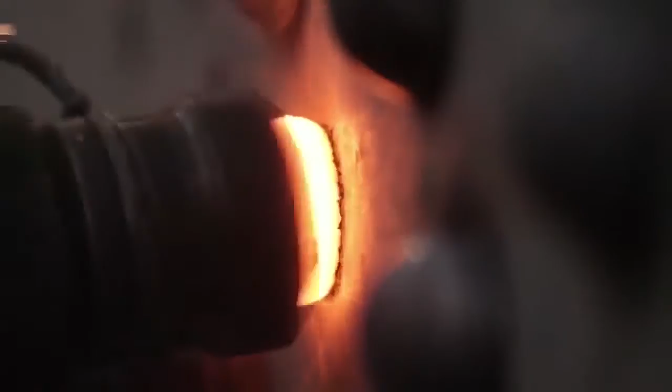But for any change to happen, you need a vision fueled by an ambition. Because everything happens twice, first in the mind and then in the world outside.

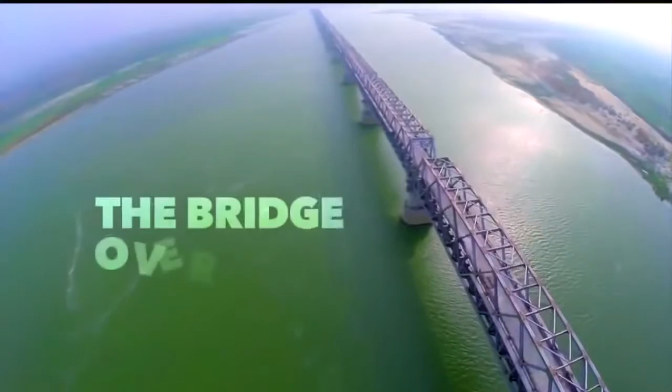The river Ganga, ancient, revered and sacred. Originating from the Himalayas, it reaches the plains, flowing merrily as it meanders its way through the Gangetic plains. By the time it reaches Bihar, the Ganges basin has extended to about 700,000 square kilometers, and the river becomes a wide giant that separates the state in two.

With passage of time, this divide has led to an unequal distribution of resources and opportunities in the state of Bihar. For economic potential to be tapped to the fullest, the need to bridge this divide has become critical.

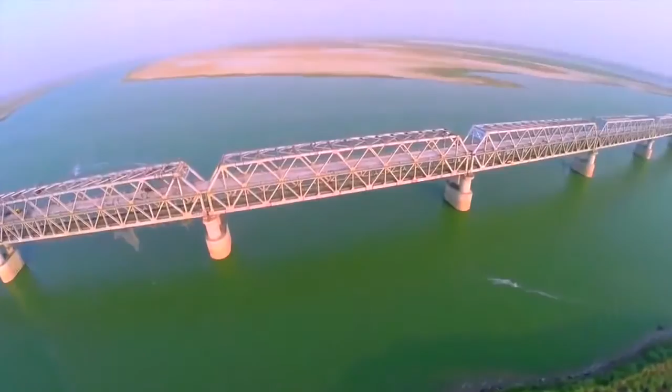IRCON was associated with this bridge in June 2008 when the Ministry of Railway awarded this work to IRCON, and since then there have been various developments over a time span of about 7 years, and now we are seeing the end of the work and commissioning of the railway line, which is going to link the southern part of Bihar across the river Ganga to northern Bihar.

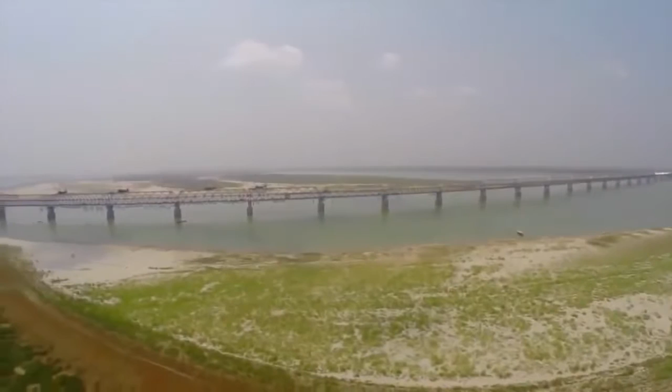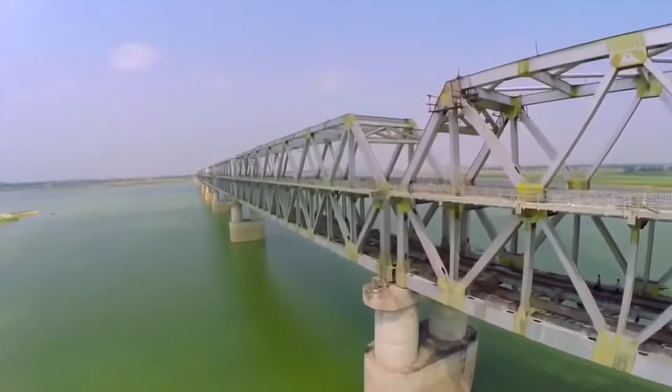36 spans of 123 meters along with 2 shore spans of 64 meters each, with 2200 tons of steel in each of these spans and 100,000 rivets. This is the longest and the heaviest superstructure on Indian Railway.

The erection of superstructure started in September 2010. Floodplains were reclaimed with boulders and earth filling to construct the first anchor span. And within a span of 4.5 years, all 36 spans of 80,000 metric tons of steel were mounted over River Ganga. This 4.56 kilometer bridge is Indian Railway's longest truss bridge.

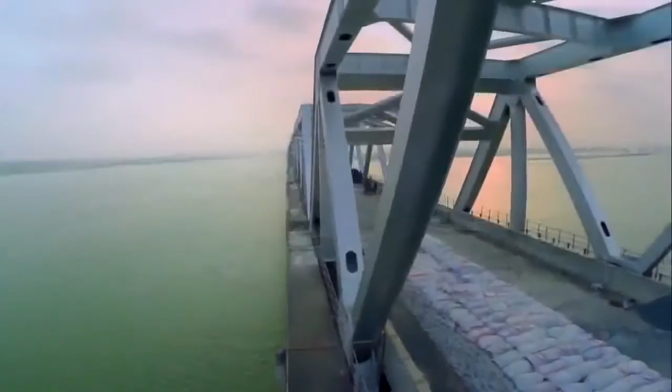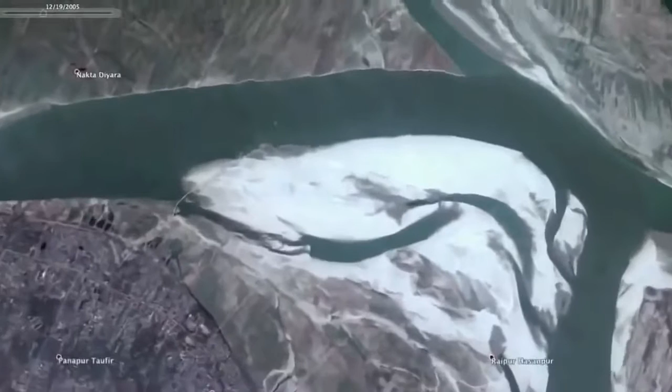The foundation laying had already begun in 2002. It was decided by the ministry to add a roadway above the railway track. By that time, the foundation and the substructure were already complete.

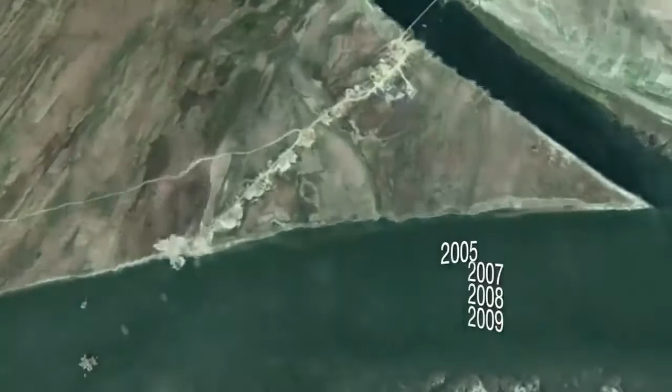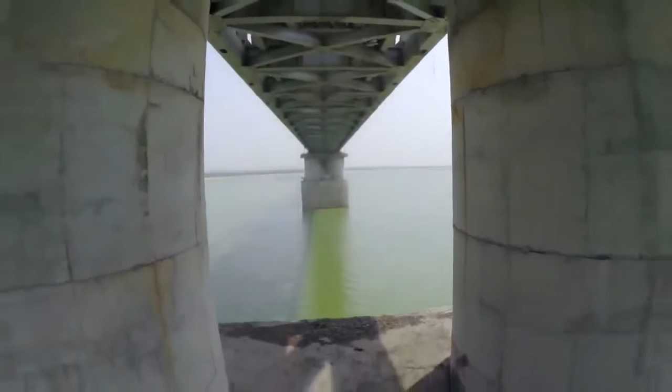This is the foundation portion, which is in the shape of a well, and the well is in the shape of a double D. We have twin circular piers of outer diameter 5.5 meters, having concrete thickness of 0.8 meters. Now the founding level is -8, so the total depth is almost 60.5 meters, which is equivalent to a 17-story building.

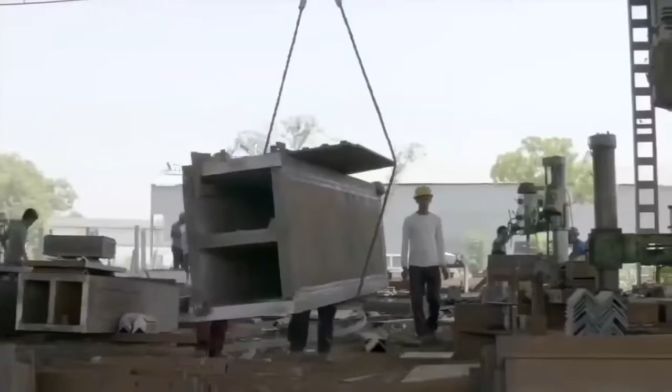To optimize the steel work, we had to go for a higher grade of steel, E450, so that the overall tonnage of the steel could be reduced and the dead weight of the superstructure could be reduced. But nonetheless, we had to use members as thick as 62 millimeters. Fabrication with 2.5-inch steel plate was itself a task.

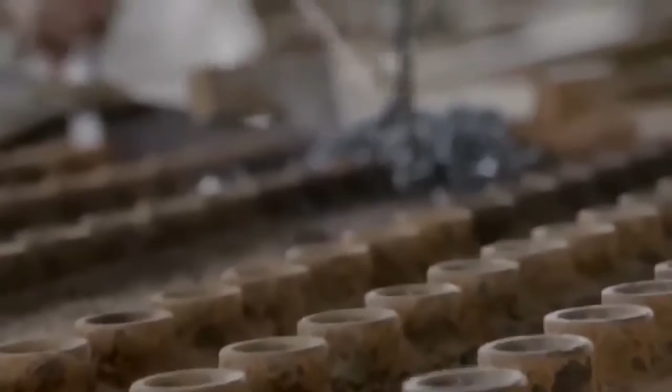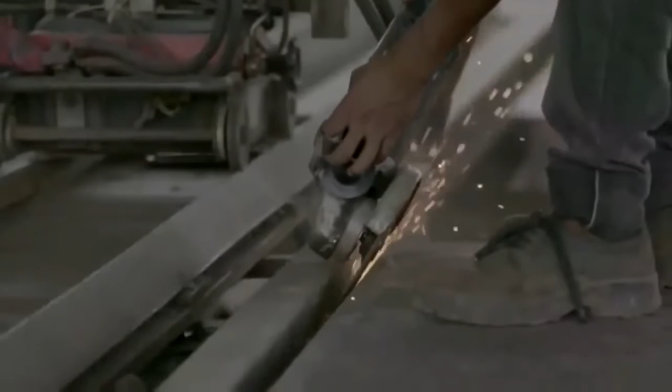Special radial drills and guide jigs become essential when numerous identical drill holes are needed in large numbers. The drill needs to be precise and absolutely correct in position. Once drilled, these plates will become part of a bigger steel component of the bridge superstructure. Then, these plates are welded to form a member of the steel truss.

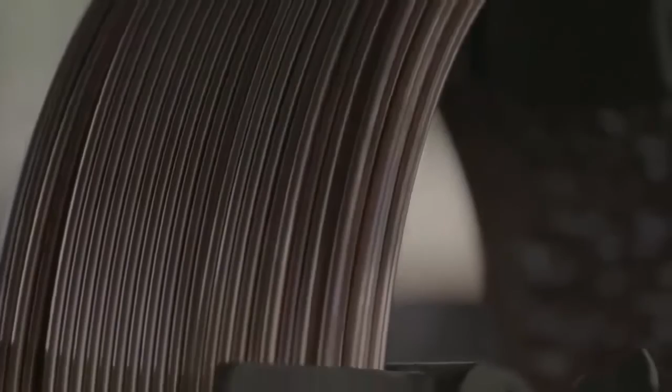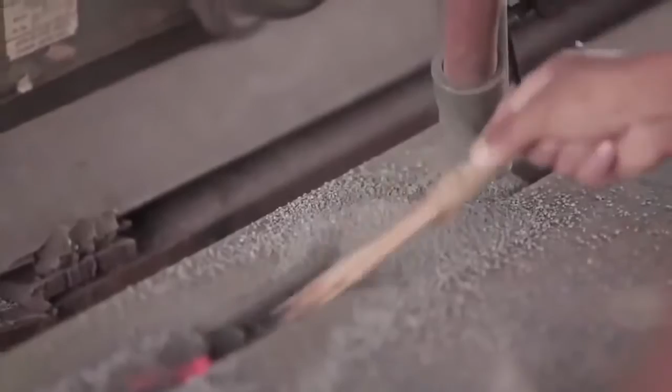A special welding technique, submerged arc welding, is being implemented. It involves formation of an arc between continuously fed bare wire electrode and the workpiece. The process uses a flux to generate protective gases and to add alloying elements to the weld pool. When molten, the flux becomes conductive and provides a current path between the electrode and the workpiece.

The molten weld and the arc zone are submerged under a granular fusible flux consisting of lime, silica, manganese oxide, calcium fluoride, and other compounds. This prevents any atmospheric contamination.

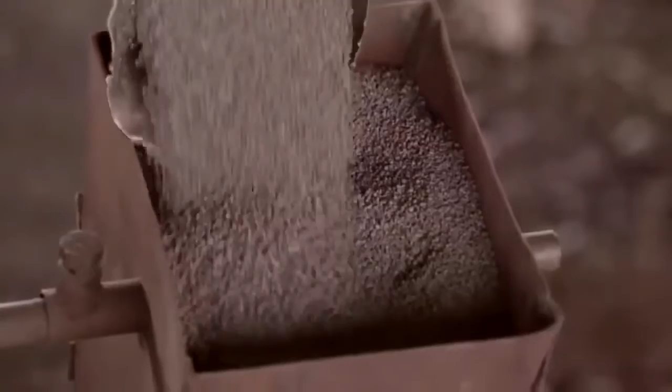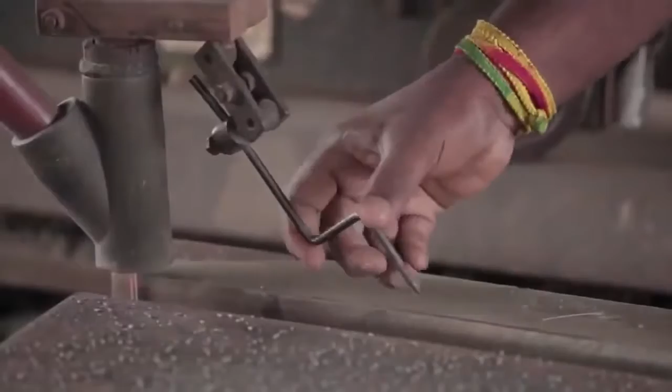Since the operator cannot observe the weld pool, great reliance must be placed on parameter setting and positioning of the filler wire. As the arc is completely covered by the flux layer, heat loss is low. There is no visible arc light, the welding is spatter-free, and there is no need for fume extraction.

Once the steel is welded, it is thoroughly checked for perfection by dye-penetrant testing. Here the white color shows the weld is seamless.

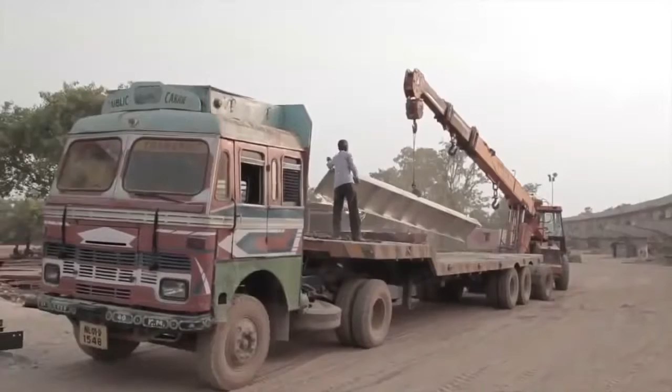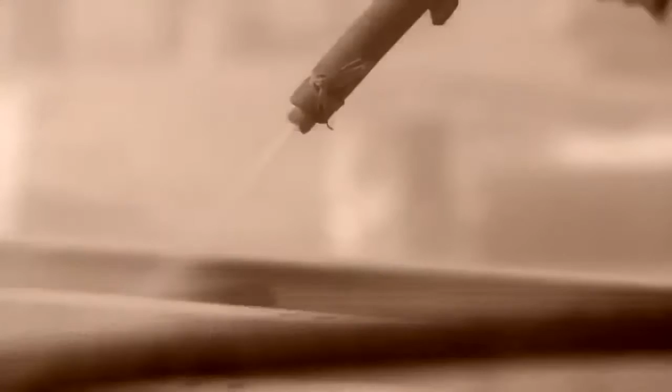The prefabricated steel components are then sandblasted and metallized. Sandblasting involves propelling very fine bits of sand at high velocity to clean the steel surface. Once sandblasted, the steel is metallized with a coat of aluminium. This will provide environment and corrosion protection to the steel for decades.

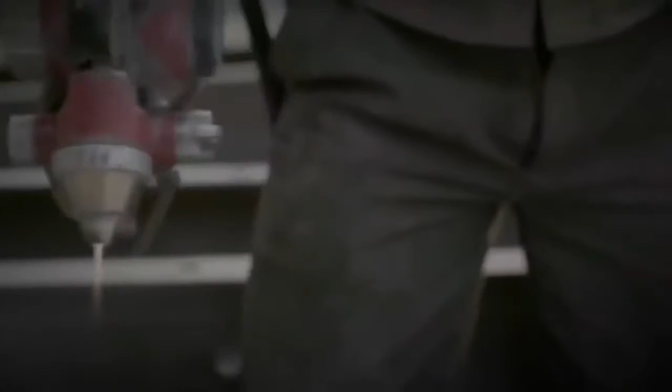The steel truss cantilever bridge was a major engineering breakthrough when first put into practice. It can span distances over 460 meters and can be more efficiently constructed at difficult locations by virtue of using little or no structural reinforcements. The construction begins with one span on ground. This serves as the anchor span for cantilever cranes mounted on top of the steel superstructure.

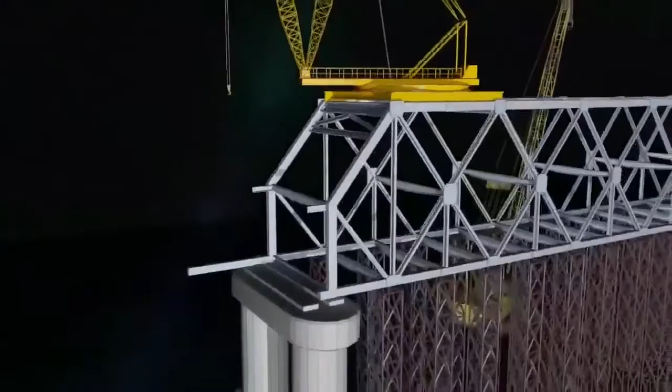Supported by a link member which holds the free end, these cranes build the next span member by member, launching ahead without any other propping from the ground. The cranes move on top, along the truss structure, adding one member at a time, forming an entire span from the free end, and land on the next pier.

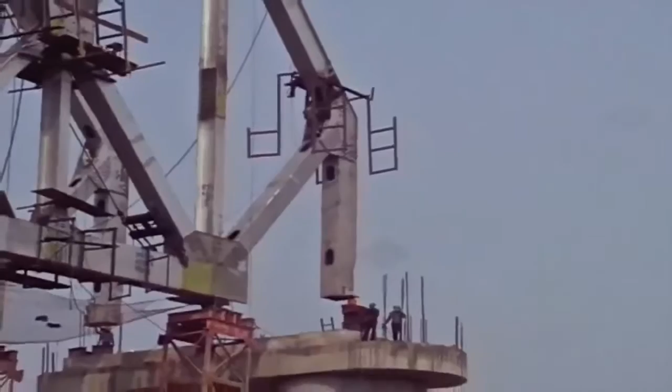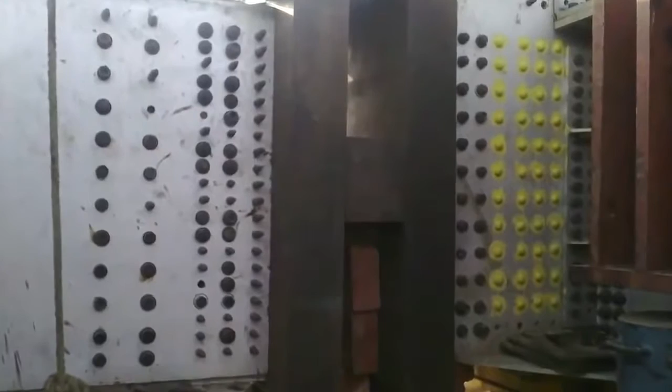Before cantilever launching of a new span, the bottom chord of the new span is blocked for any backward horizontal movement. It is done by inserting a buffer block between the bottom chord of the anchor span and the bottom chord of the new span. The vertical movement of the buffer block is monitored to assess the vertical deflection caused at the far end of the new span being launched.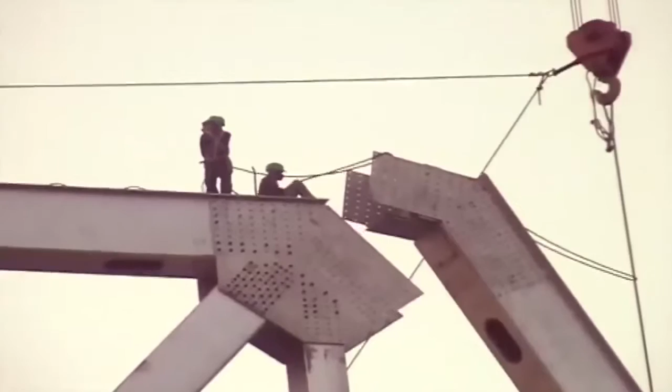For cantilever launching, the fabricated members were lifted to the rail level by ground cranes, then transported on temporary tracks. At the launch end, these members were lifted by cantilever cranes and fixed with drifts and bolts. On one single span of the superstructure, there are over 100,000 rivets.

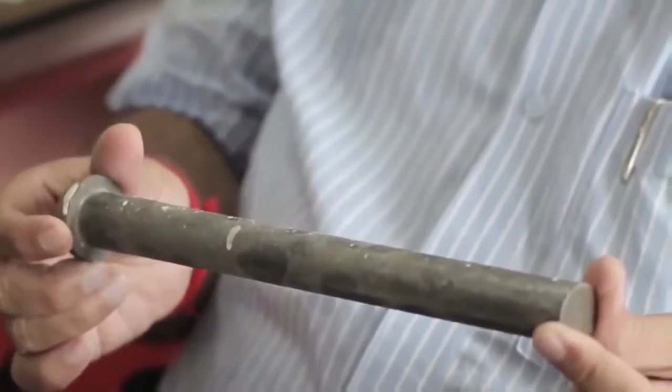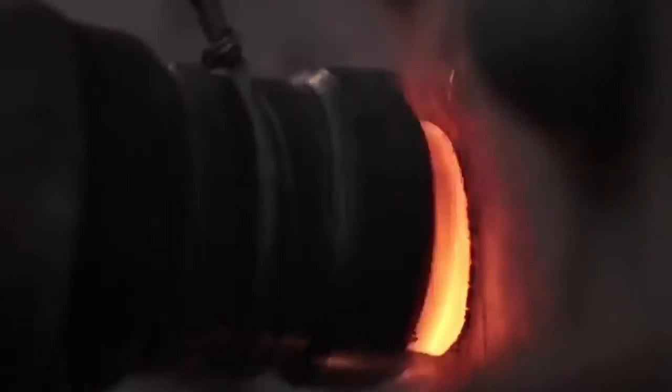A rivet is a permanent mechanical fastener. It is a smooth cylindrical iron shaft with a head on one end. The end opposite to the head is called the tail. And the red hot tail is then pounded to form a new head. In other words, pounding creates a new head on the other end, resulting in a rivet that once cooled has fixed itself permanently on both ends.

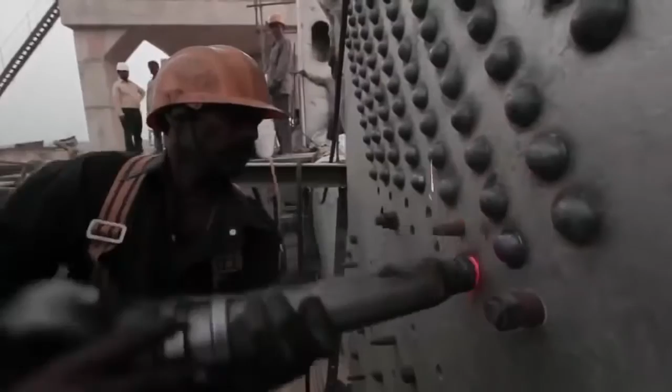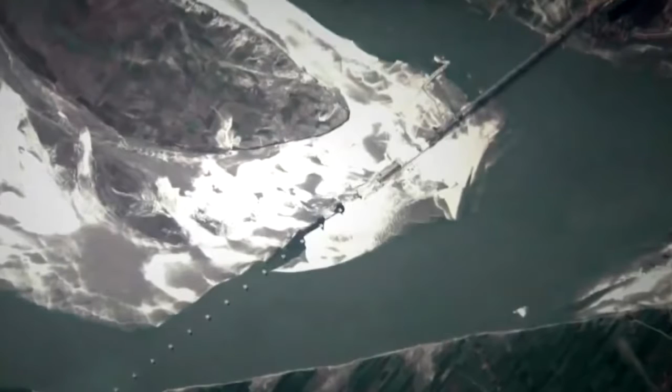In order to accomplish the task more efficiently, the engineers started construction from both sides and had plans to open a third front. But the forces of nature had something else in store for them. This island, before the 2013 floods, protruded beyond this 11th span of the bridge, up to say 100 meters on the downstream side. And suddenly, in the floods of 2013, this got washed out.

It was a very big challenge for us. Then how to continue with our ambitious plan of a third front? And then we thought of a bigger barge. We brought a big barge of 1200 metric ton capacity, which carried material from the shore on the north end to the place of erection, and the entire material was lifted by the cantilever crane right from the barge, and erection was continued.

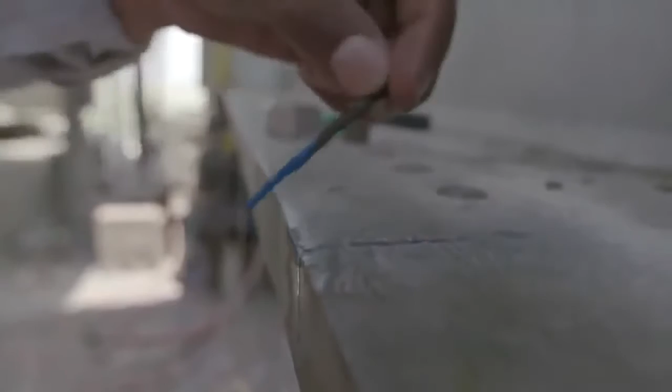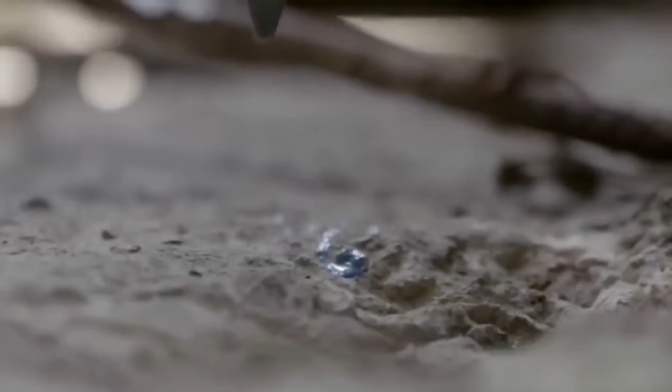And if the alignment of the truss does not match the central alignment of the bridge, the entire 2,240 metric ton truss will have to be shifted into alignment.

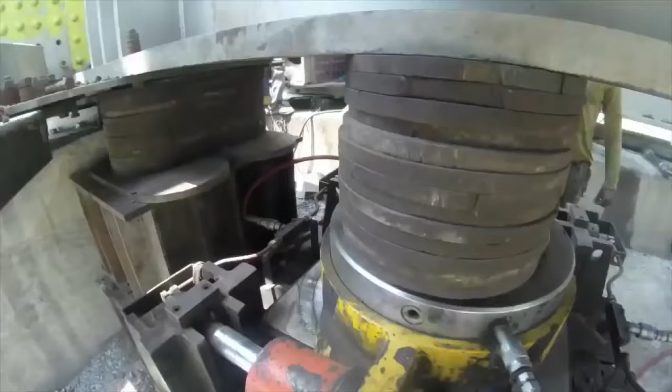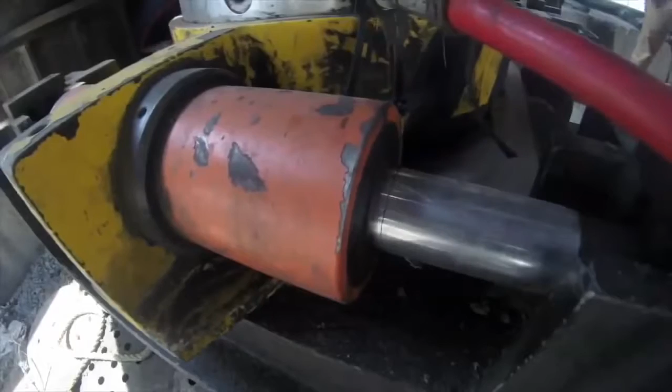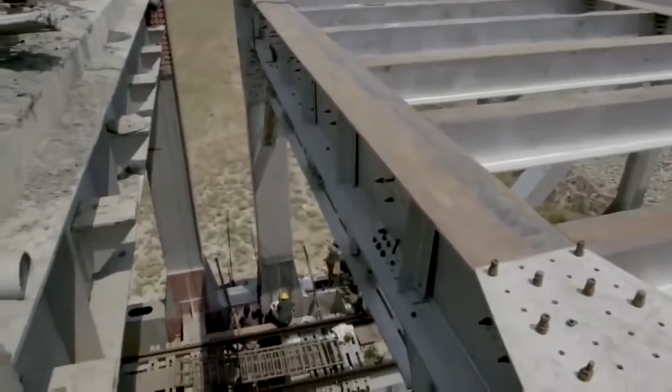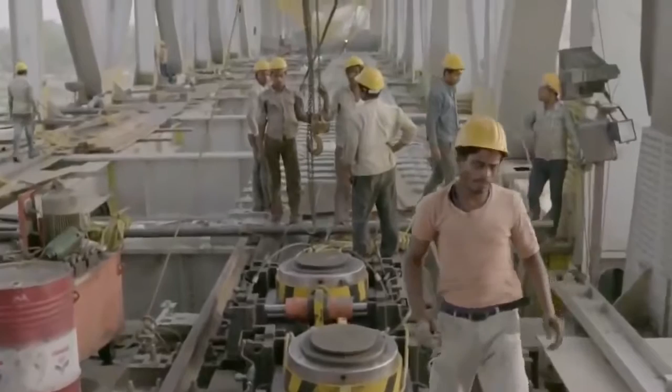To build a road deck on the second level of the steel structure, the engineers had an unprecedented challenge. The concrete casting could have been done by providing traditional support reinforcements from the rail level below. But the engineers had to find a way that would not hinder the railway work and accomplish both tasks simultaneously without affecting the other. Generally, we use props from ground, and using props from ground would have hindered the work.

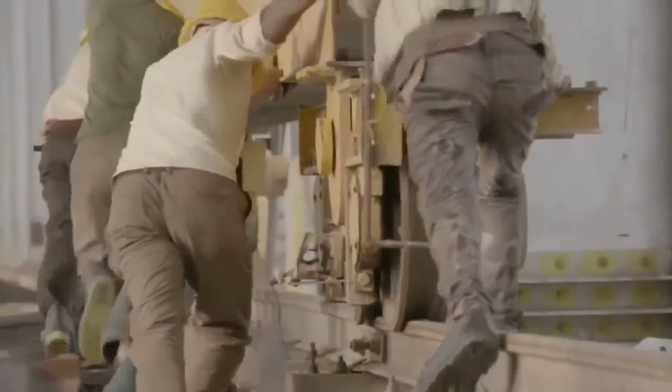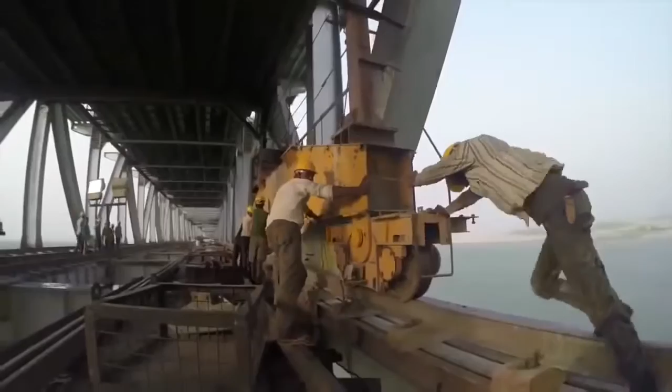So we devised a method which does not use the support system. As you can see here, there is a gantry, and behind me again there is a system which is independent of support from ground. So they developed a gantry that runs on the rails and holds aloft a large steel shutter that provides the support needed for the road construction above.

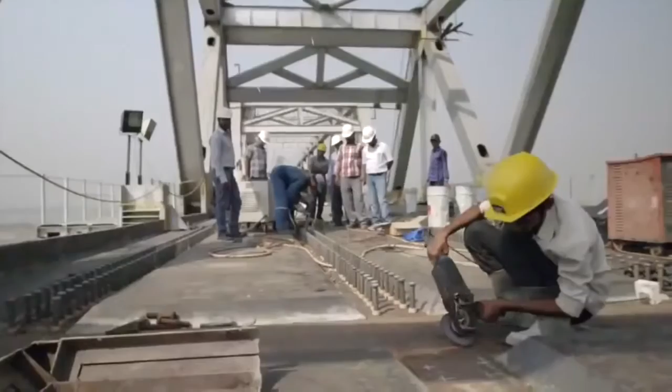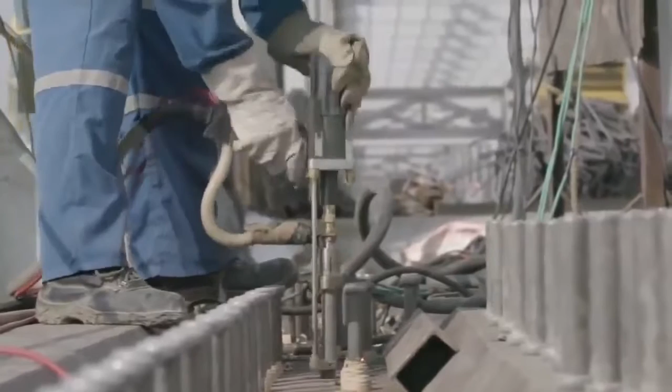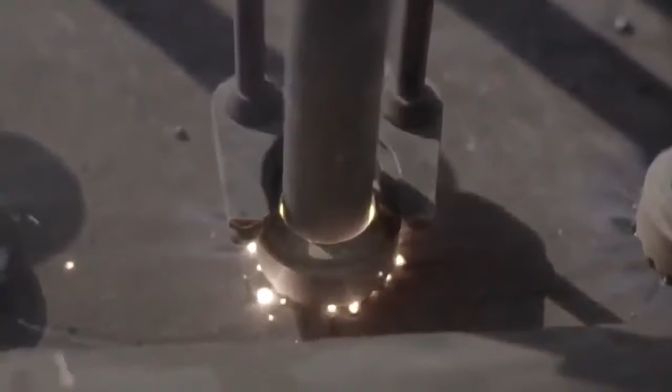On the deck, the shutter is fixed and team is welding shear studs into the steel structure. Stud location and straightness of alignment of row over the steel cross girder and road stringers is marked with precision and care. Surface around welding location is cleaned by buffing wheel and made free from rust, dust and paint.

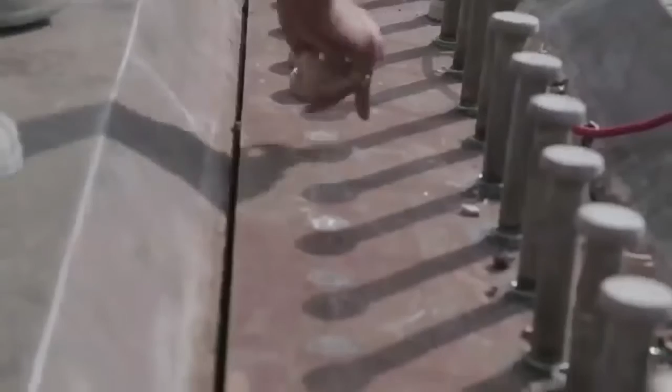The stud welding gun uses a type of flux called ferrule, a ceramic ring, which concentrates the heat, prevents oxidation and retains the molten metal in the weld zone.

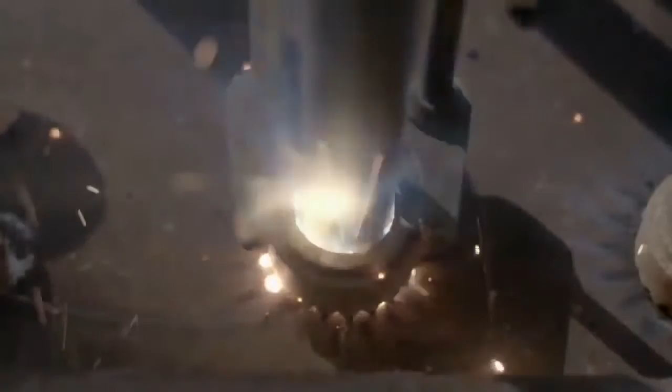Expansion joint is an assembly designed to safely absorb the heat-induced expansion and contraction of construction materials. It absorbs vibrations, it holds parts together and allows movement due to ground settlement or earthquakes. This joint greatly reduces the stress that would otherwise be caused to the main structure.

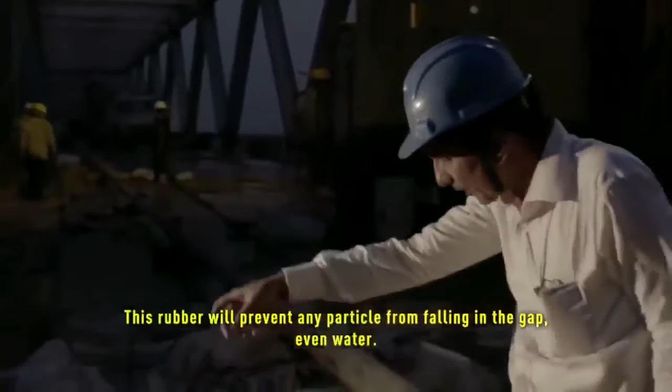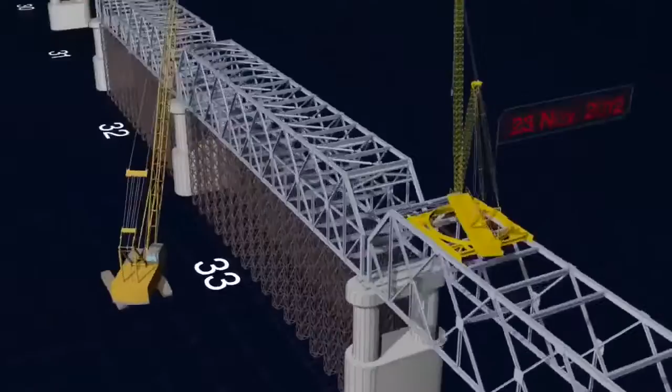Not even water. The first anchor span was erected on trestles in September 2010, initiating cantilever erection from the southern end. While on the north side, the erection began in January 2011. Taking advantage of the dry weather, additional anchor spans were built wherever there was ground support. Even midstream, the span number 27 had a patch of land underneath, adding a third front for the cantilever erection.

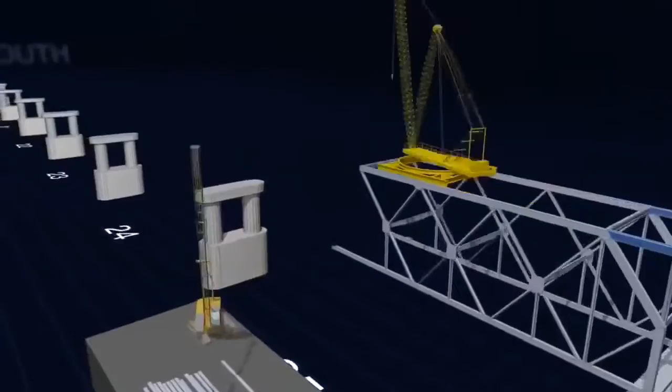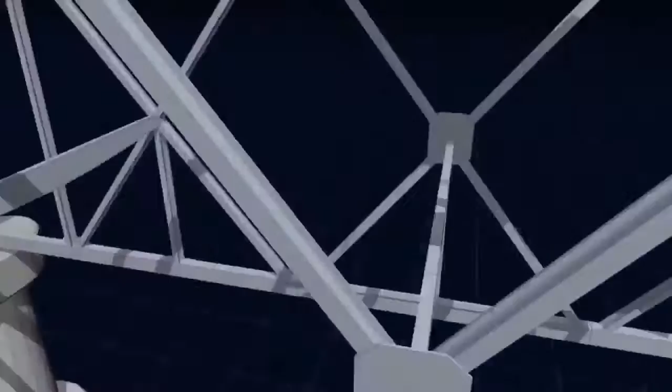But in 2013 floods, the land got washed away, so a floating barge was used to feed the material for midstream cantilever erection. This expedited the progress, and within 4.5 years, the erection of superstructure was complete. On 2nd of January 2015, when a bottom chord member was placed to bridge the last gap, the link between north and south was finally established.

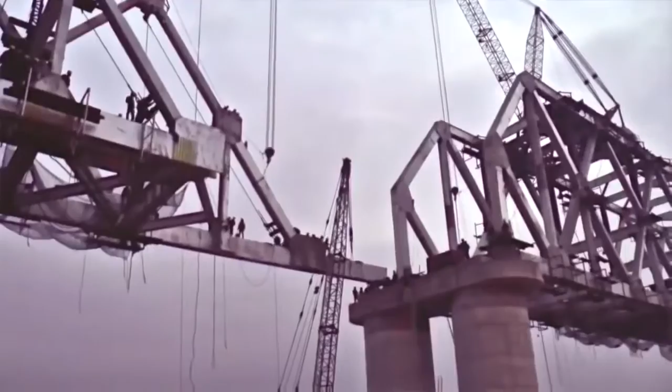Such kind of structures are not built daily or annually or every decade. Such kind of bridge may be a once in a lifetime construction, and I am fortunate that I have been associated with this bridge. Not many engineers will get a chance to be associated with such kind of a mega bridge construction. From technical point of view also, it is a feather in the cap of Indian Railways.

It is the longest rail-cum-road bridge in the country at 4.94 kilometers. Most of the fabrication is welded, and there is as much as 200 kilometers of welding which has been done for the bridge, and at joints we have provided rivets totaling almost 4 million. So these are all big achievements.

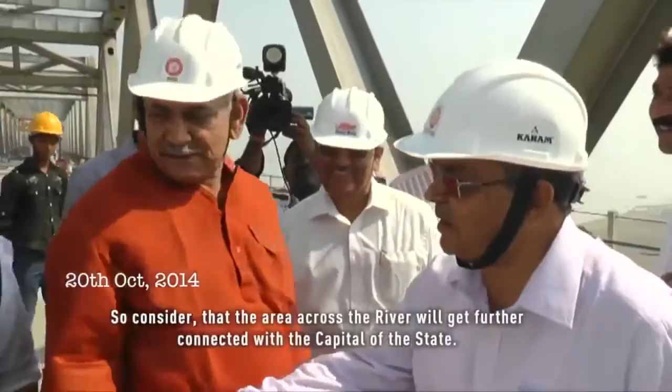8th August 2015, the air resounds with victorious and joyous cheers of people around. The engineers are ready to run their first railway engine over the bridge.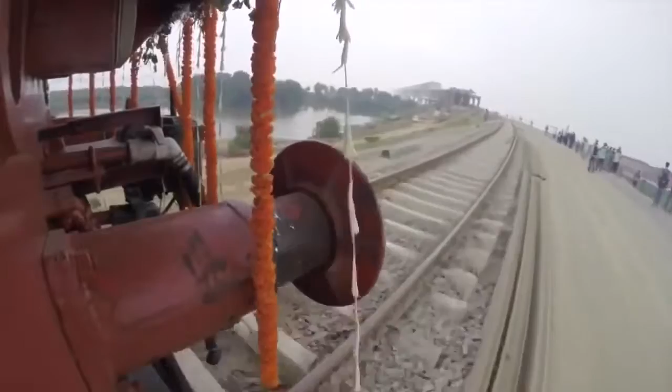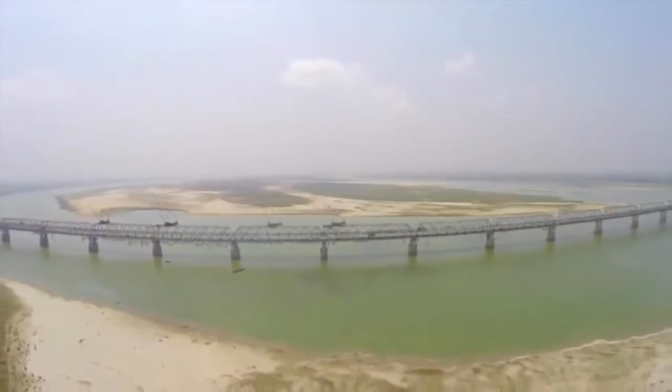Connectivity is the key to economic prosperity. When human resource is mobilized, unprecedented growth can be actualized. Job opportunities, agricultural exchange, tourism, increased productivity and efficiency are some of the immediate gains the bridge will deliver. However, homogeneous growth, decongestion of urban areas, and increased participation of villages to Bihar's economic growth will be the key long-term impact of this initiative.

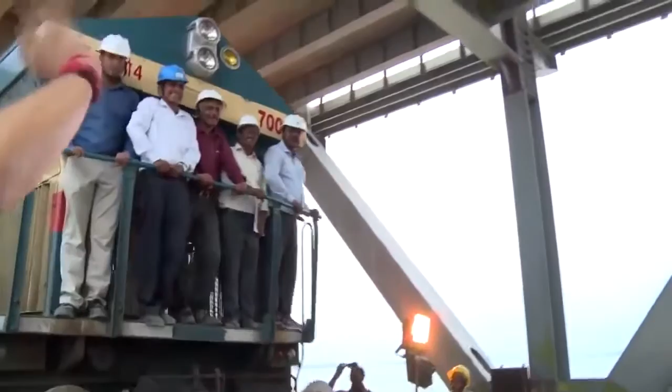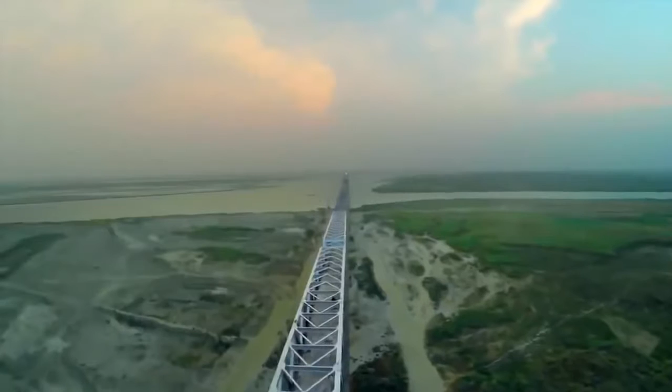Bihar stands on a threshold of a dynamic phase for growth and development. This bridge over Ganges, connecting Patna with Sonpur, will be a turning point for Bihar.